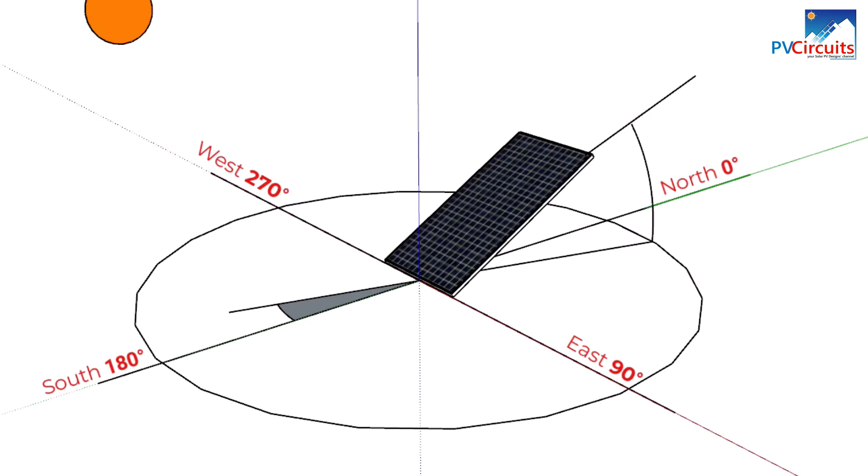Point number 2, the module's tilt angle to the horizontal is critical as to how much radiation will be directed normal to the panel. This is calculated from the latitude of the location where you are installing the system, or alternatively as dictated by the pitch of your roof. In this section, we are looking at how to set up the tilt angle and the azimuth angle. The tilt angle is based on this equation.

And if we look at this diagram, we can try to rotate the module to show both the tilt angle and the azimuth angle. So I start with the tilt angle, and if I use this protractor to demonstrate the tilt angle, it is that angle between the horizontal and the vertical tip of the module. As you can see there, that should give us the tilt angle.

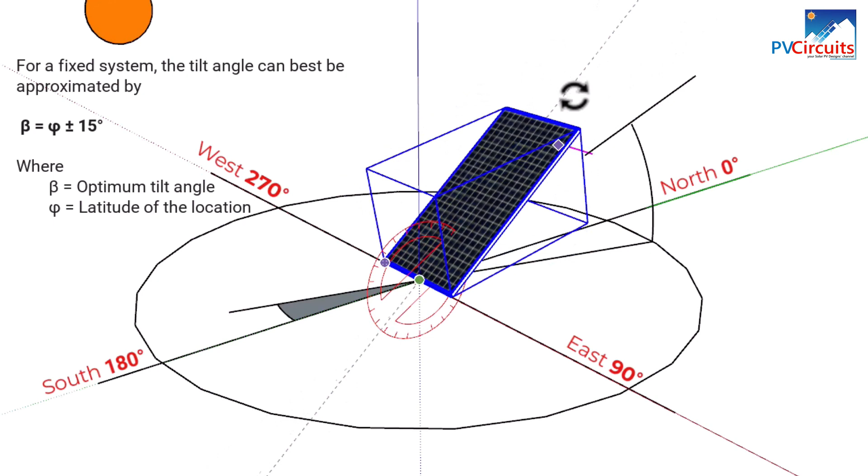And from the equation that we've just shown, you will be able to calculate based on your latitude where you are, and that will give you the tilt angle of the module. But this will be useful if you are doing a new module mounting. Otherwise, unless you put a mounting on the roof, the pitch of the roof will already fix the inclination of the module.

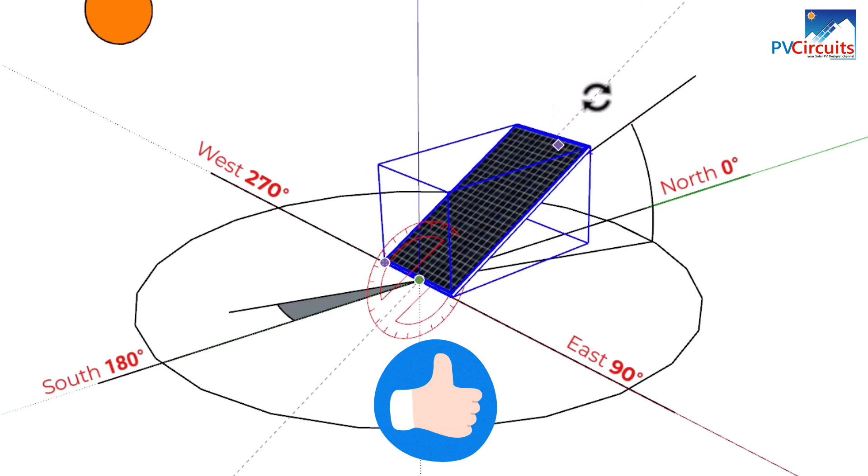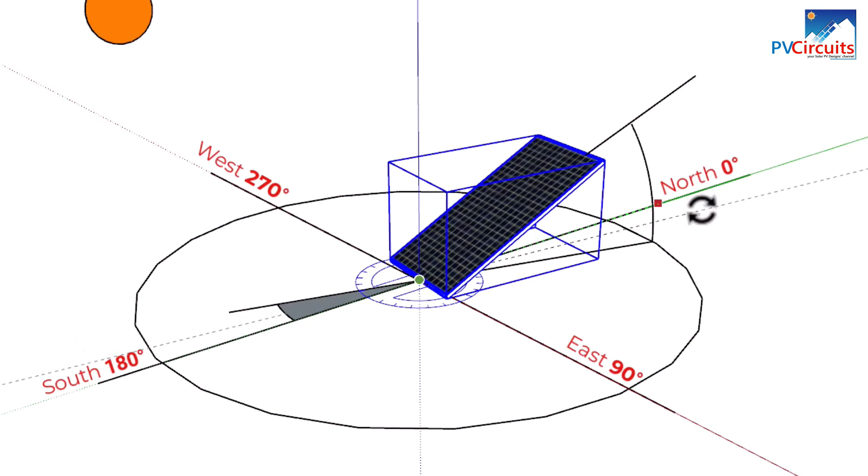If we look at the azimuth, it is the horizontal angle from the north, and it is measured based on your magnetic compass direction from the north. So that angle, the dotted line, giving us the clockwise movement from the north to south, is what you measure as your azimuth. And by using a magnetic compass or a mobile app, you can measure the azimuth.

So it is just that simple. It's not a complicated thing. So once you have the right tools, then you can determine the two angles that are required for setting your PV module for maximum solar irradiation collection. So we move back to the design.

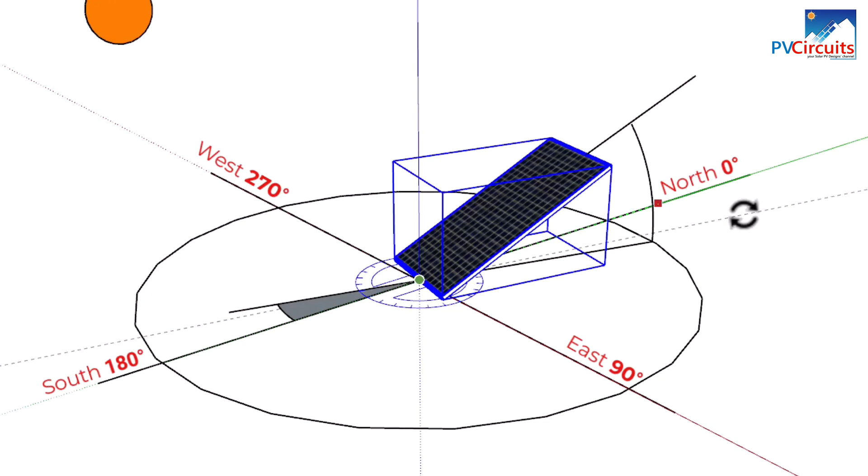The third point is the sun hours. The critical thing about the sun hours is the lowest irradiance that will be required to generate the needed output. During the year, it is required to know the month with the lowest sun hours, and this is what is used as the basis for the design.

For safety and security, it is required to observe personal safety during installation and security for the modules if the site is to be accessed by unauthorized persons. The other aspects that you need to observe during the site assessment include aesthetics, accessibility, roofing material strength, and the structure. This is for a roof PV system, because if you will be stepping on the roof, then you need to take caution so that the roof is preserved during the installation.

So there are 3 types of PV systems that are of interest to us. We start off with the off-grid system, and as the name suggests, this system is not connected to the grid. So we solely rely on the PV supply in order to charge our batteries. During the day, the battery is being charged. Then part of that power, if it is in excess, can go to serve the electrical components in the house.

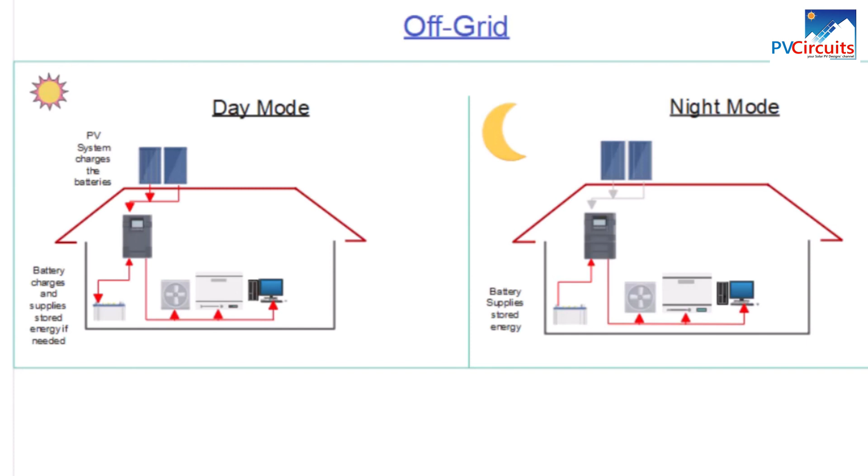At night, because there's no more charging of the batteries from the PV, the stored power goes to the inverter to generate AC for the household. So should it happen that the power is not enough, then we are likely to have a blackout. So that is one unique thing with the off-grid system.

Next, we look at the on-grid system, and in this system the supply is generated from two sides. One side is the PV system, which generates power to the inverter, then it serves the household components.

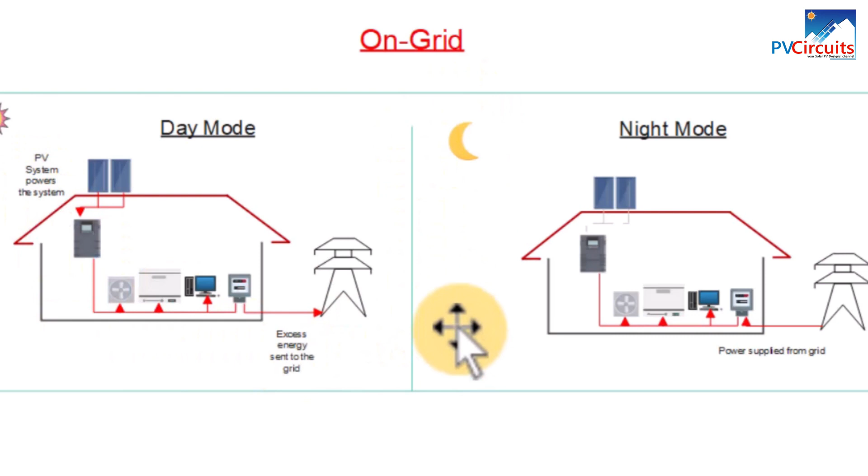Then if there is excess, it is passed on through the bidirectional meter to the grid. Otherwise, if there is no excess power, then there is likely power to come from the grid to supplement what the PV is producing. So at night, because there is no sun, the PVs are not generating power, so the only power should be from the grid.

In the hybrid system, we are having a combination of both the off-grid and on-grid modes. So in this particular system, what will happen during the day is that we will have it like the off-grid, where the PV will be charging the batteries and storing energy, and the excess energy will go to serve the electrical appliances in the household. Then the excess will pass through the utility meter and onto the grid. So that's during the day.

At night things change because there's no more charging with the PV panels. The only power now comes from the battery, and it serves the electrical appliances, and if there's a shortfall, the shortfall is met by the utility side or the utility supply.

In the off-grid mode, the utility is not connected, and during the day the PV panels charge a battery, and there is interaction both forward and backward, because if there is enough power, then the batteries are charged, and if there is a shortfall in what is demanded by the electrical appliances, then that power comes from the battery. If the power is not enough, the off-grid mode will lead to a blackout, because there will be no power from other sources since the grid is disconnected. So in this mode, as the name says, it is working just like the off-grid that we have seen earlier.

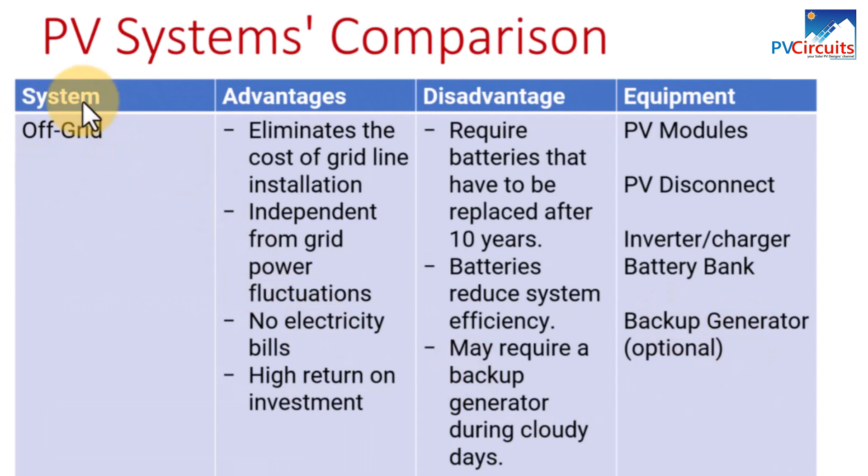Other points are that we need this equipment here. We need modules, disconnect switches, an inverter charger, a battery bank, and in some cases a backup generator. Of course, this may not be required, but at times the battery may go low and maybe the sun is not there to recharge. Then you may need something to supply power to the system, because we are off-grid and there's no line connected to our system.

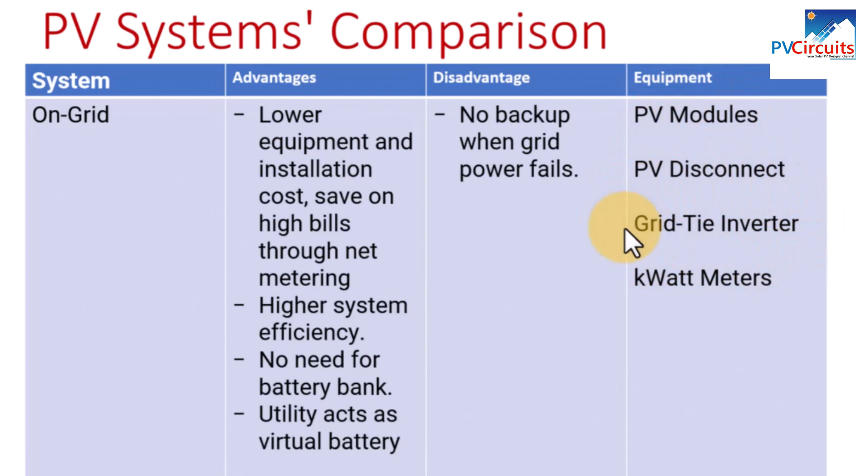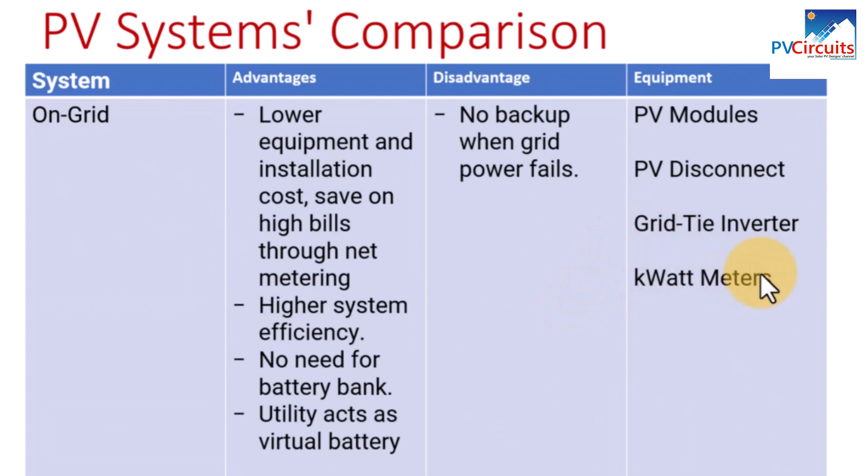The next system that we look at is the on-grid system, and we just look at the key points. There's no need for the battery bank, because the grid will act as a virtual battery, because you're just producing power and sending it to the grid. And some of the things that we need here are the grid tie inverter, and we will require the kilowatt meter that will monitor what you're producing, and also the grid company's meter which will monitor what they are feeding into our system.

The third system that we listed was the hybrid system. The hybrid system is a combination between on and off grid and has characteristics of both systems. The system can be set such that the PV power is exhausted before the grid is connected. That is a setting you put in the inverter, which will dictate when the power from the grid will enter into your house system. The battery provides a backup when the grid goes off and ensures an uninterrupted power supply. And as you have seen from this discussion, the hybrid system gives the best of both worlds of on and off grid systems. So this is the system that we are going to design for our home using the PVsyst software.

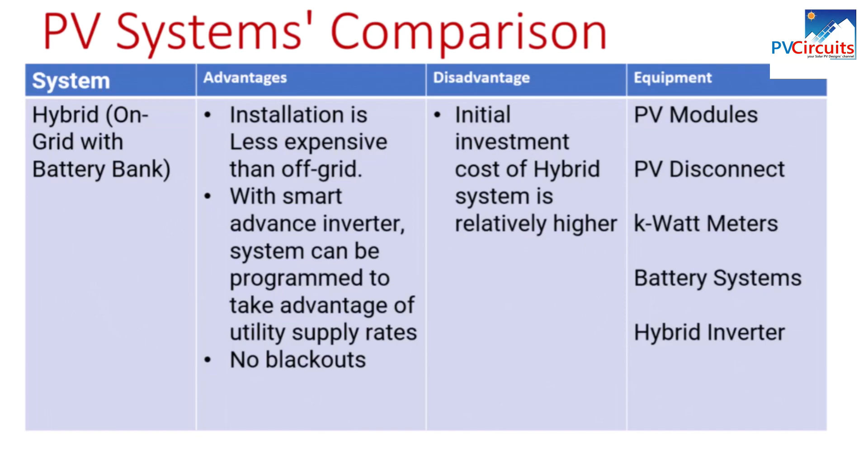However, the grid connected, when you add the loads to it, because it has the option for adding loads, then it becomes the hybrid system, which now has a component for supplying the excess power to the grid, but most of it is used in the house.

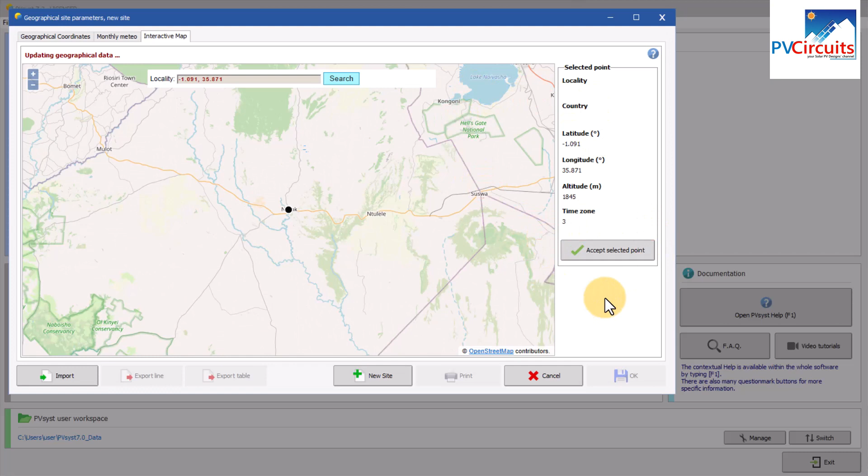Then I'll accept the selected point, then it wants me to put in a name. Let me just call it as the name of the town. Then I'll tell it to get the data, because we are looking for the data, so I'll tell it to get from the coordinates, and we click that.

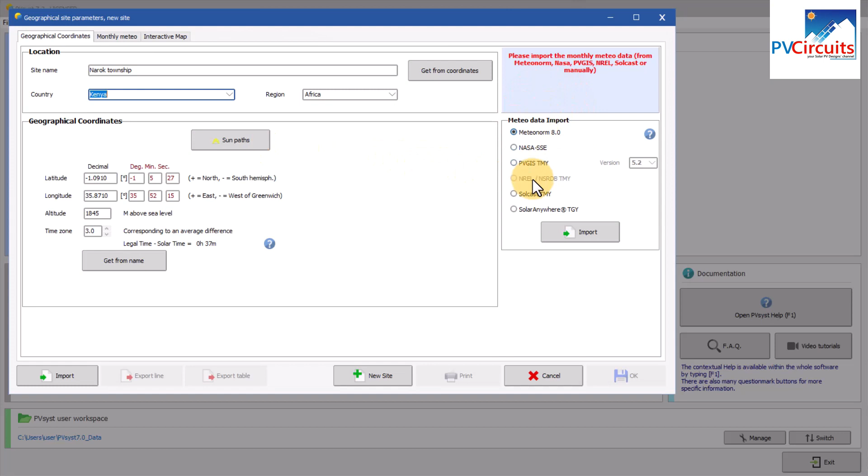So it needs me to define the country, so of course I'll select the country is Kenya. Then once I do that, this part opens up to allow us to import the monthly meteo data, and we are getting it from Meteonorm. So I'll click import. So having good connection is very important. So you can see it has brought for me this data for the site.

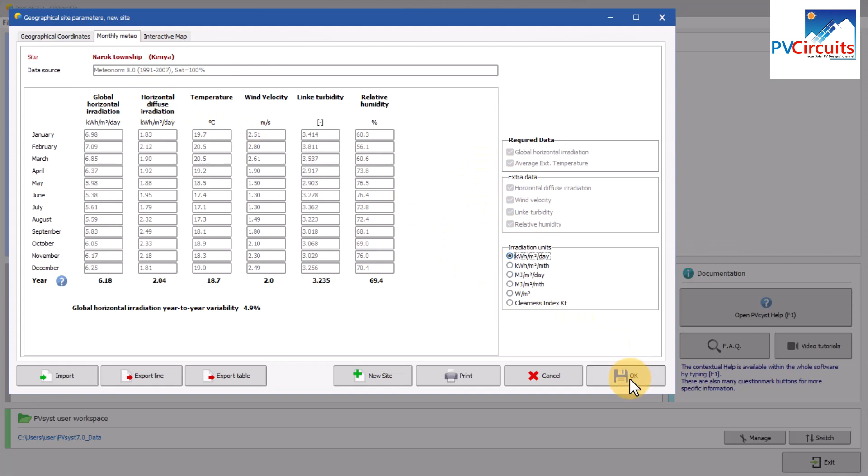This is a global horizontal irradiation, which we need, which will tell us the sun hours. So instead of this highlighted one, I'll pick on this one for the day, not for the month. Then with that, I'll accept this data, click OK. Then I'll save it. The dialog here is the geographical site file Narok Township is now saved in the database. I'll say OK.

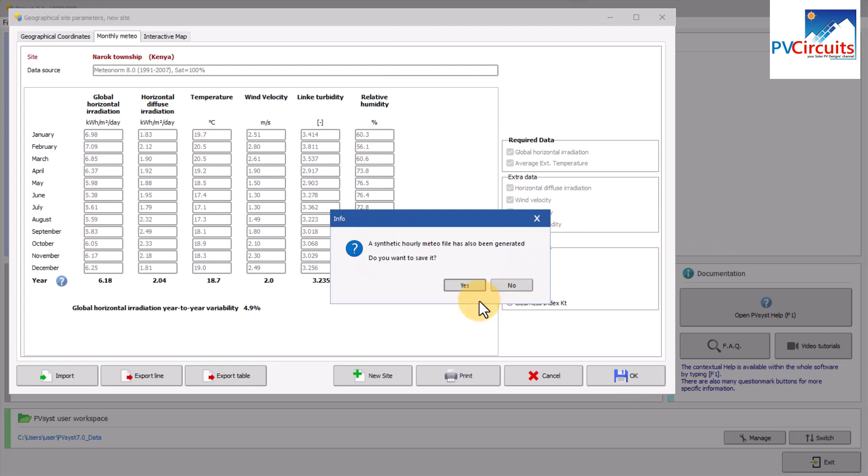Then accept this one. So this is saved. Then the data is now into the system. So from here, it wants us to, selected Narok file, please save project. So I'll save the project. So once it has saved, it opens up this page, which is where the main design is going to take place based on the following tabs going around. And then eventually it will open the simulation part.

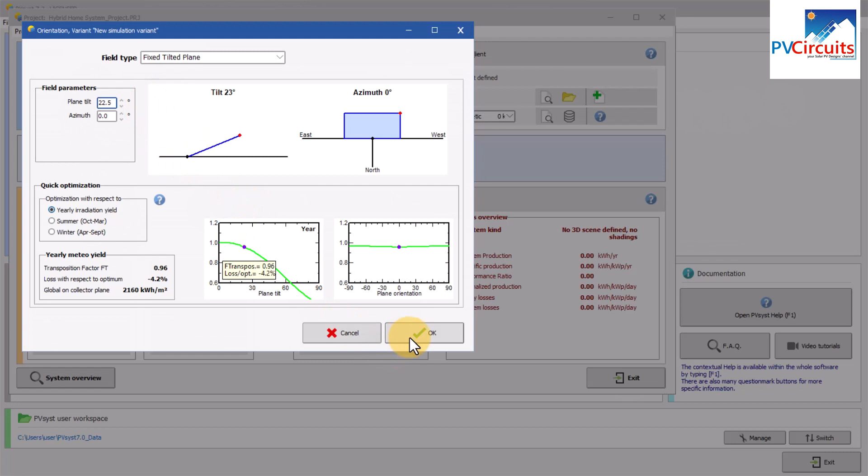So the first thing to do is to do the orientation. And here we supply the details of our roof, because this is going to be on the roof, and our pitch is 22.5. The azimuth is 0 because we are in the south, so I'll accept that. So you can see the orientation has turned green. Then I go to the system.

And the system here, we need to supply the planned power. Then we'll select the modules, then we select the inverter, then the other information it will process. So let's start by giving our planned power. So I'm going to put about 1.8 kilowatt. Then we need the PV modules to supply that power. So I'll select, okay, it has selected Jinkosolar, so I'll go by that Jinkosolar. There are others though in the list. As you can see, there's quite a number in the list.

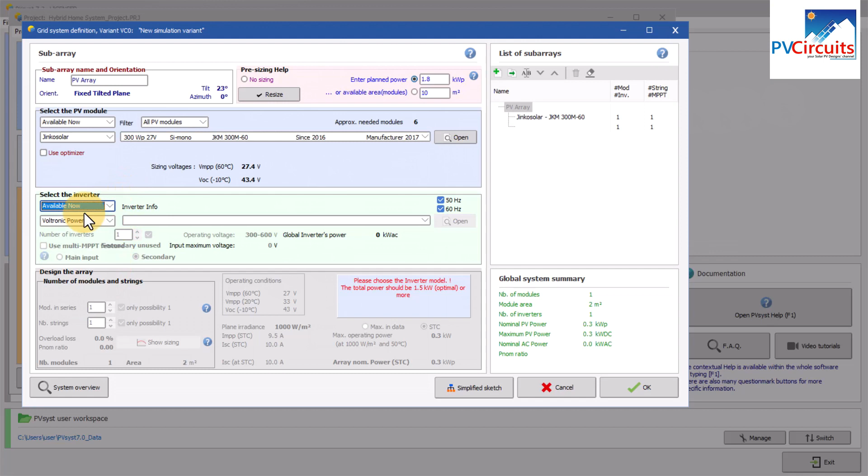Then we select the Jinko that we're looking for. Now to get 1.8, I'll go for a Jinko of 300 watts. So 300 watts is here. Then I think that is okay. So it is seen that we are going to use 6 modules to get, of course, 1.8 kilowatt. Then we give it the inverter now. So here we look for the inverter, and the one I want to use is, yeah, this one, Voltronic Power. That is a company name.

Yes, and this inverter was not in the database. I've just put it. So if you don't find the inverter you're looking for, because this is where the main design is, by just selecting any inverter, you will not know the characteristic of that inverter. You need to have its data sheet so that you can be sure that the inverter you are looking for is the right one that you're putting for the design. Because the inverter that we are using now, this Voltronic Power, and with that model there, InfiniSolar.

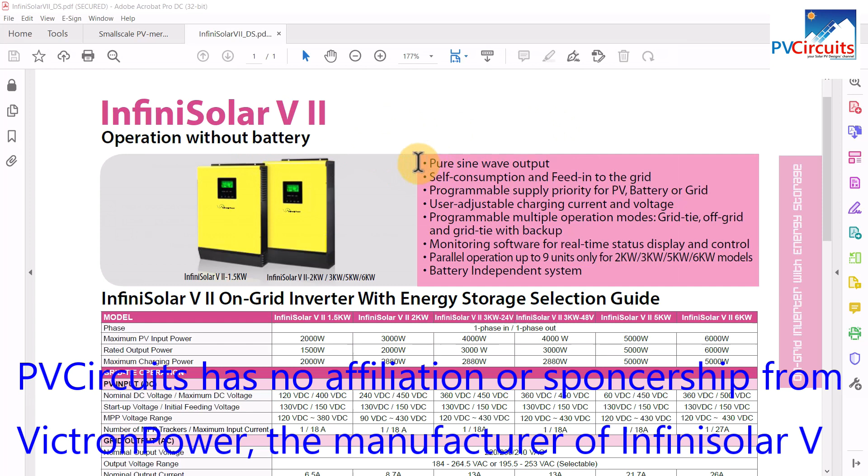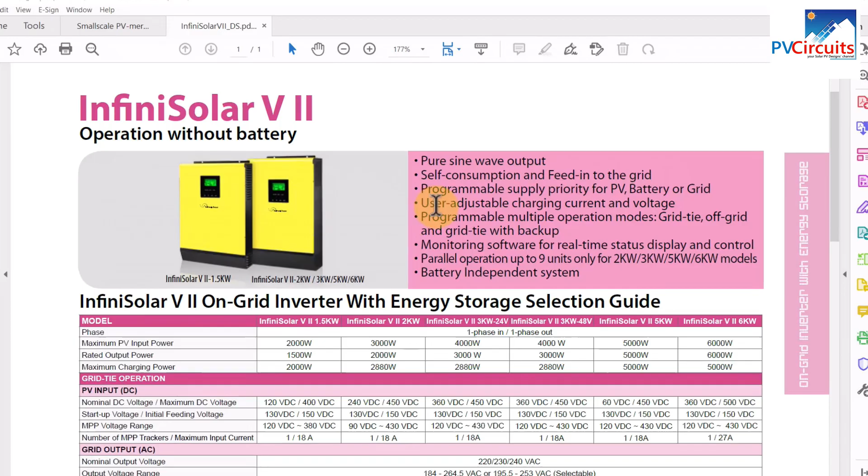Now this inverter, if we look at the data sheet of the inverter, you will see that this is a grid tie inverter, but with very specific functions. So there is this part of self-consumption and feeding into the grid. This part is very important, and also there is the part of the charging of the battery, so that you're using the power for self-consumption, but also the excess is fed into the grid. This is a unique part of this inverter.

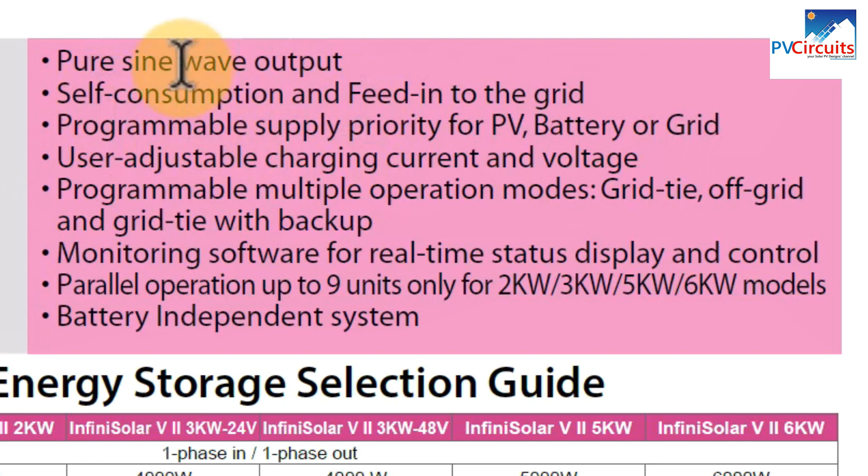You can of course use other inverters and combine it with a charger controller, so that you have now 2 electronic devices there, the controller and the inverter, to give you this functionality that is on this single inverter. So that is why I've selected this inverter, to be able to take us through this design.

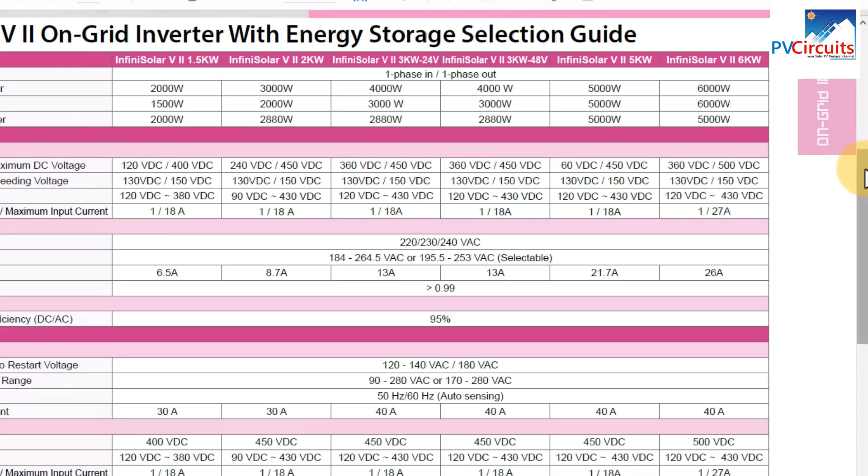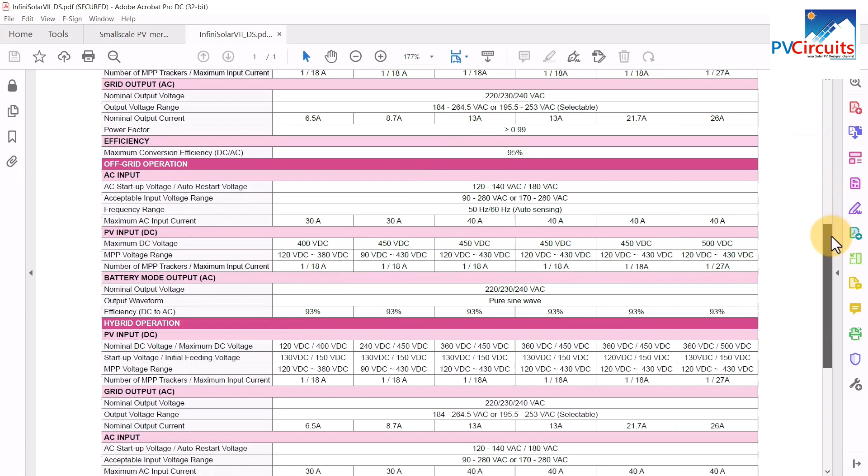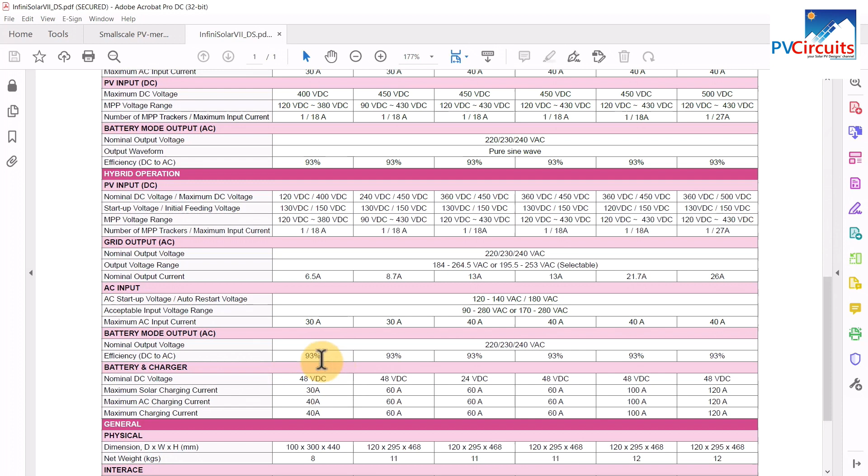Also, some of the notable features of this inverter, if we just scroll down on the datasheet, we see the voltage nominal and the maximum it can take per string. Then what we'll use immediately is the battery charger, and that it is a 48 VDC. So we shall see this when we are selecting the battery for the storage. So we go back to PVsyst and continue with the design.

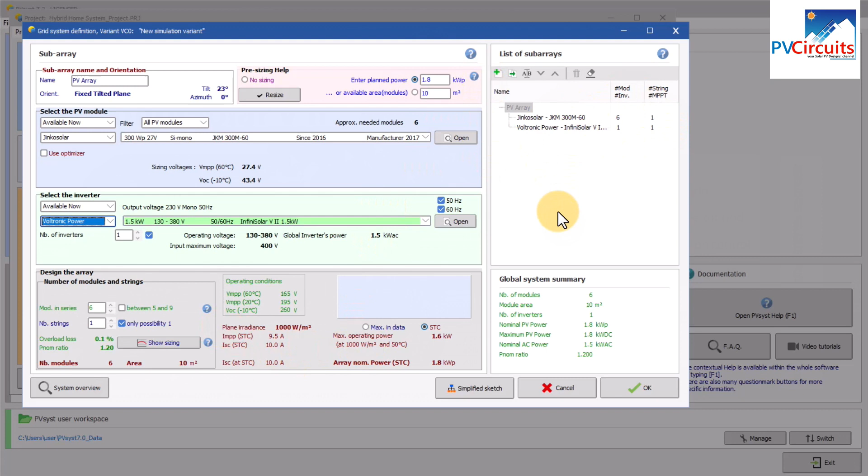So if we look here, we see that it is saying that it will have 5 modules in series, although we have 6. For us to be able to have this power, I think I'll push it up and slightly overpower the system, so that still there's no error here. So we continue with 6 modules in series and 1 string. On this side I think everything is okay, so let's proceed. Then the system is set. We are still not going to run the simulation because we still have all this to do.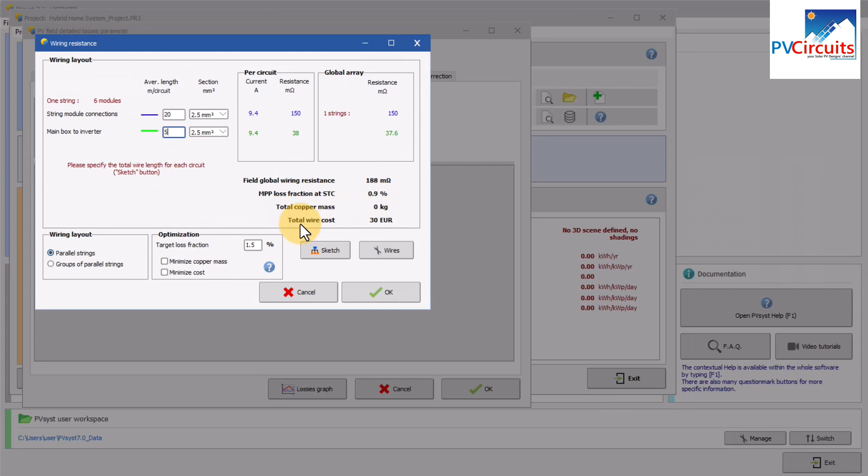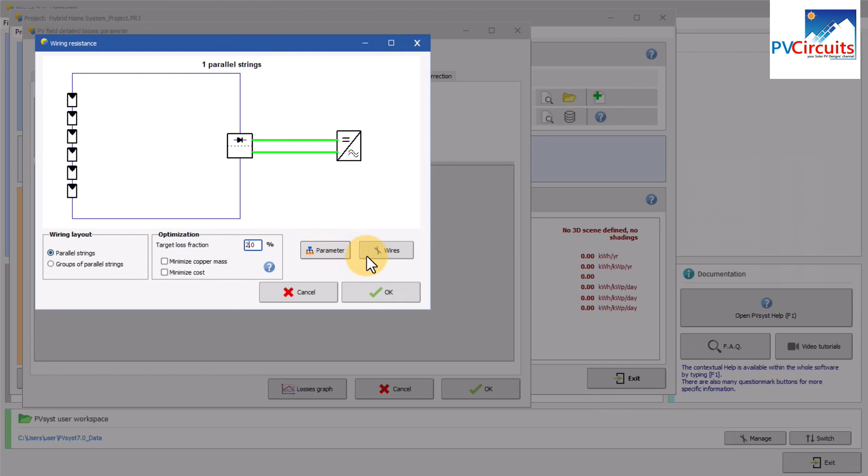And there it is. So looking at this, global array resistance is 150 milliohms. Then we can see the losses here at about 0.9%. So let us look at the sketch. That is a sketch, and this is what we are looking at. Let's go to the target loss fraction. Most of the time I'll put here 2%. Then we look at the wires, and the wires I think were done in a design earlier, and this is just estimation of the wire prices. So this is just okay. I move on to the next stage.

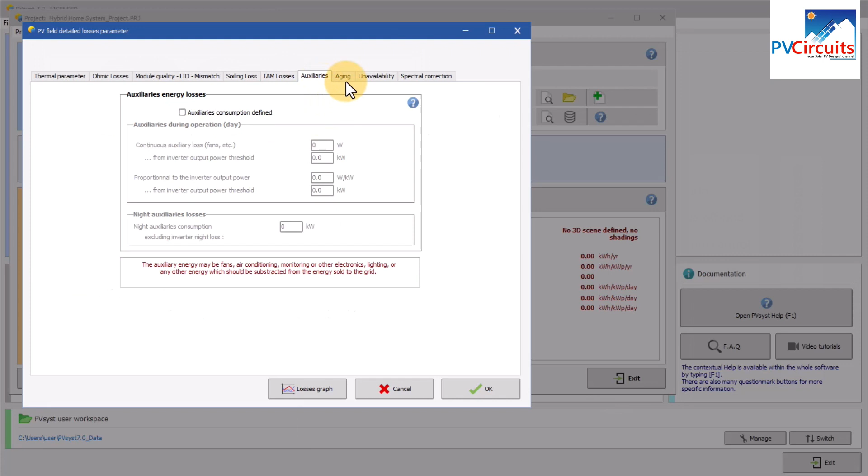Ohmic losses, module quality, I'll not touch that. Soiling loss, maybe I need to put something here because after all these things will be dirty and so on, so I'll take on the default value they have. Then other losses, I'll leave them as they are. So I think we are done with that section. I'll say okay.

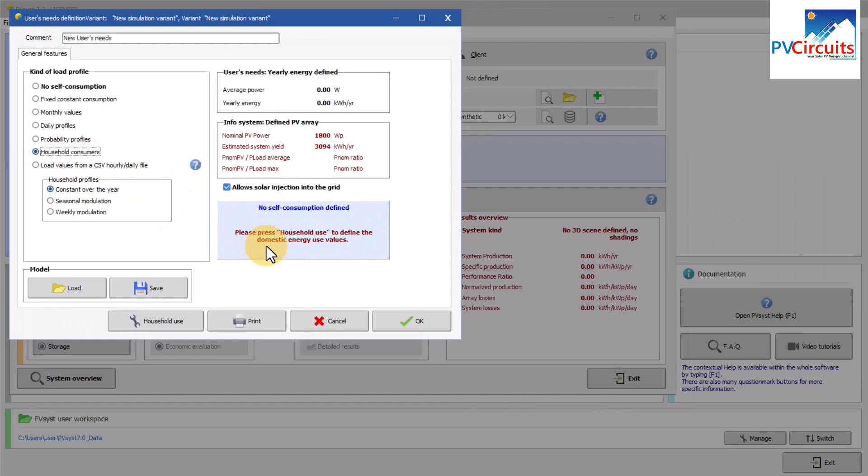Self-consumption. Now as you've seen, the inverter is feeding to the grid, but it has the part for self-consumption. Self-consumption means that the power it is producing will first of all be used in the household before it's taken to the grid. So I'll click on this one, and we need to define the usage of the items in the house that are going to use power. So I'll click on household consumers. Those are the items in the house, and when you click that, this screen comes here. Always look at this blue screen here to tell you error messages or what you need to do.

So here it is telling us we have not defined, so please press household use, which is this one here, and when I click on that, it opens up this table where I am supposed to fill the items or the electrical loads in the house. So if I start with this one, these are lamps, so I'll put about 5 lamps. These are lamps in the house, and when I click on that, it opens up. So the power that each lamp uses is 10 watts.

Then I have one TV using about 150 watts. That is TV, 150 watts. Then another item is the laptop, one laptop, and then I give it 120 watts. I come to the fridge, one fridge, and maybe give it 2.5 kilowatt hour per day. I don't have a dishwasher.

So other thing, I can put in 4 security lamps, using about 10 watts each, as in the first case. Then other uses, miscellaneous electrical items in the house using power, so I'll give them about 100 watts. So if you have other things, you can group them or combine them if the space is not enough.

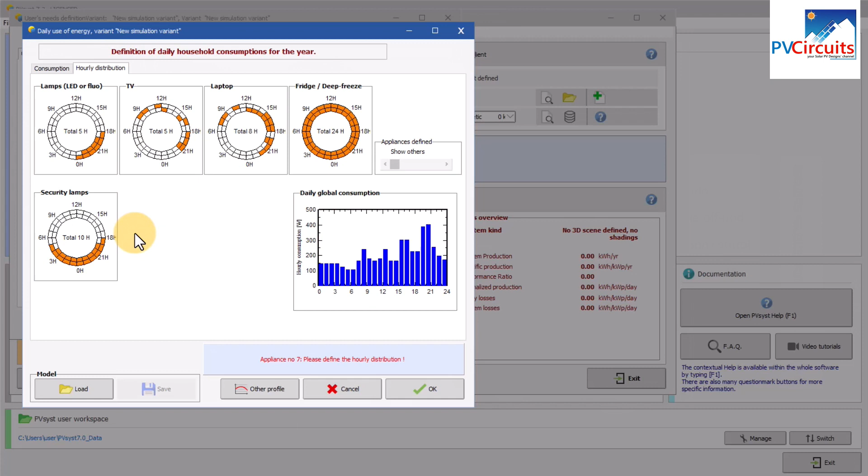Then we move on to the security lamps, and these will be on till close to the wee hours of the morning. So we continue like that up to maybe 5:30 there. Now if you don't see something, you move this thing here so as to show you all the items that you have. So you can see the other uses was hidden somewhere. So now it has come out, so I'll fill it.

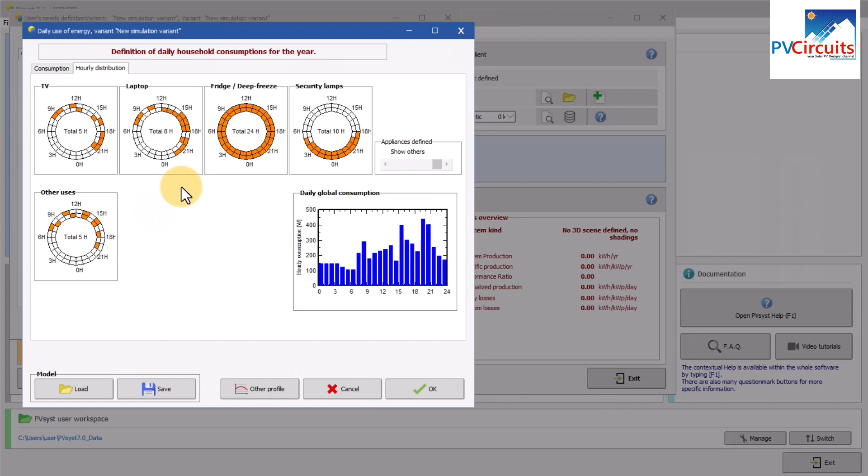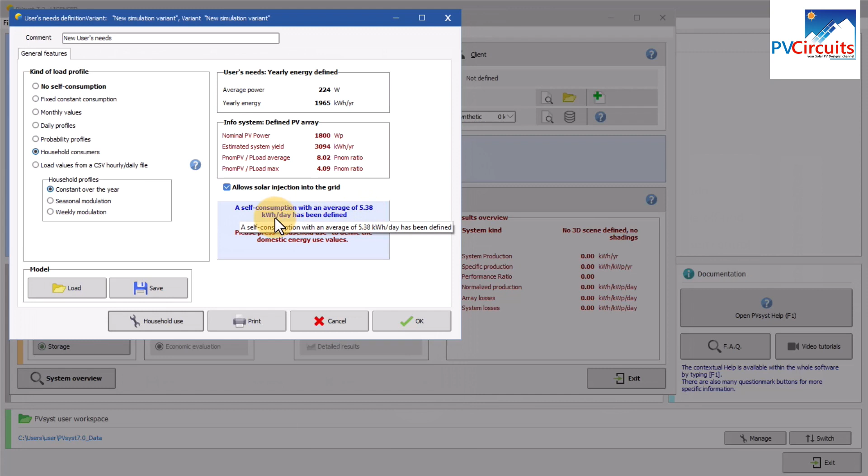So other uses also for 5 hours, and these are small items using electricity in the house, charging phone, maybe the blender, and so on. Right, so that one is done. So I think all of them are done. If you want to be sure, go back to the consumption and you can now see everything is okay. So we are done with the consumption. I'll tick OK. The message here is a self-consumption with an average of 5.38 kilowatt hour per day has been defined. So this is okay.

So you can see the self-consumption is now highlighted. So there's an issue of the storage, so let's go to the storage: please choose a storage strategy. So what do we want to do? We want storage for self-consumption, and when you do that, it opens up the battery for you to select. The consumption is what we have already told it. You can see that it has already picked it. If I click on it, it will show us what I've done before. Yeah, we were here before, so let me just cancel that.

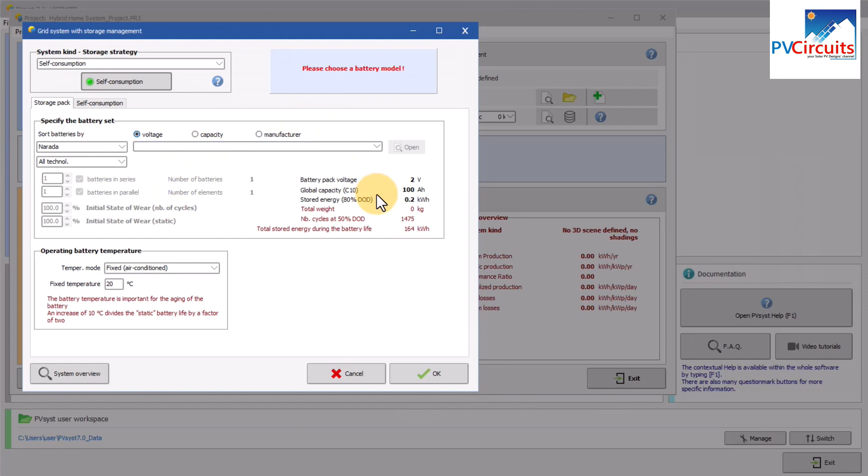Then here we are supposed to select the battery. So before I can select the battery, we need to know the system ampere hours so that we can decide how many batteries we are going to use. And for that, I'll step out here so that we can look at a presentation of how to determine the system battery. So in order to calculate our battery requirements, we are going to use this equation here, and it states that the system ampere hours is given by the daily consumption times the days of autonomy, meaning the days you'd want.

If the system is down, then you still have power from a battery, then divided by the system voltage times the depth of discharge times the inverter efficiency times the battery derating. So that gives us the battery size of the system.

Now if we look at what we have already calculated, we already have the daily consumption as 5380 watt hours per day. Then the inverter system voltage is 48 volts VDC. Then the days of autonomy, we want that we can be 1 day, full day without power. If I wanted maybe 2 days, that will increase the cost of the batteries. And the depth of discharge is how much do you want the batteries to be drained before recharging takes on. So we want it at 50%.

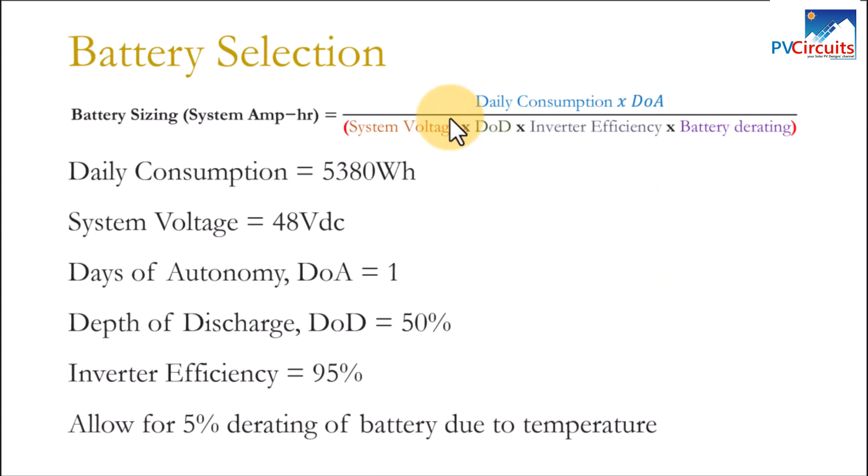Then we have the inverter efficiency. Then because of temperature affecting the battery cells, we have to adjust that, and we derate the batteries by 5%, meaning that they're operating at 95% efficiency. So that is the equation. When you put in the figures, we get the system ampere hours as 248.4, and that approximates to about 300 ampere hours. So the batteries that can work with this system are 12 volt at 150 ampere hours.

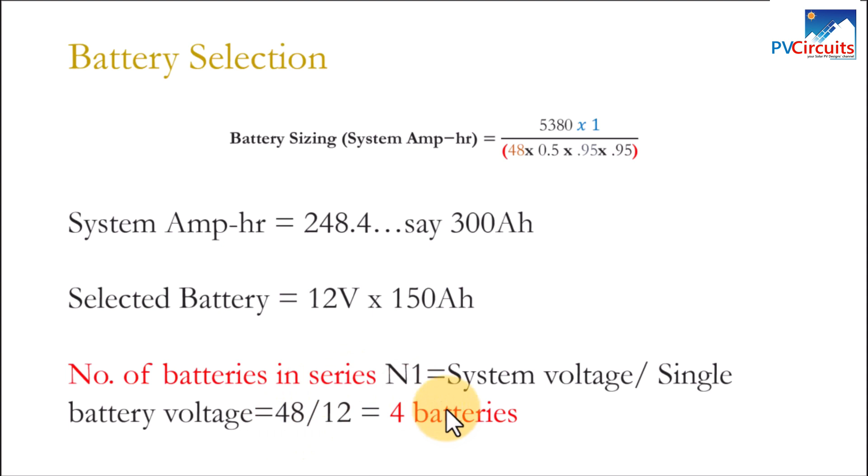So to know the number of batteries in series, we take the system voltage divided by our battery size here, and that gives us 4 batteries in series to get 48 volts. Then we look at the number of batteries in parallel, or the strings. This is given by the system ampere hours, which we have calculated at 300, divided by the ampere hours of the battery. So we have 2 strings, meaning that we have 4 batteries in series times 2 strings. So there we are, we have finished that calculation.

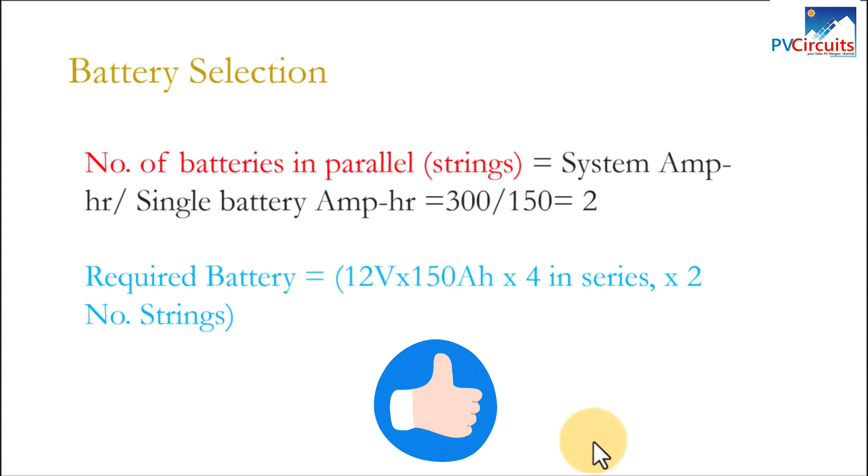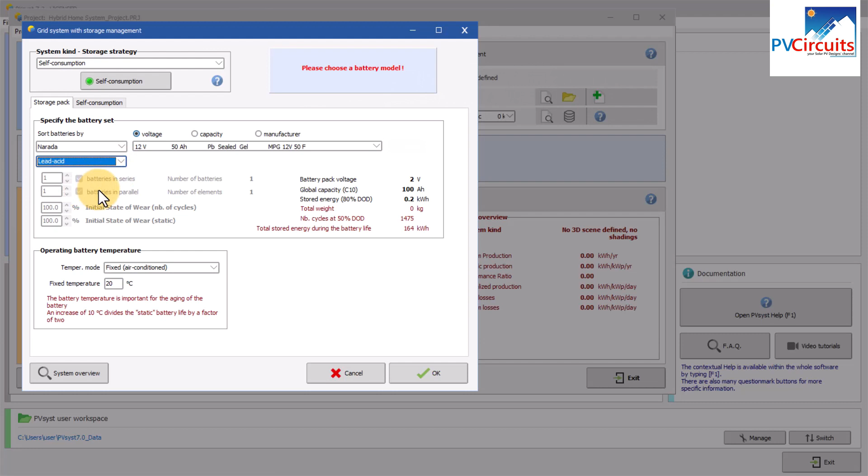We go back to PVSyst to continue with our design. So we have gone through that battery selection presentation. Now let us put that information here in PVSyst. If we open here, this gives you the names of companies that are making batteries. And there's a technology, so I'll choose lead acid. Then from this company they have a list of batteries one can select from. The battery that we've selected is a 12 volt 150 ampere hours, and it is this one here.

Then we have seen that we need 4 batteries in series so that we get 48 volts. So I'll put that one. So 48 volts. And then we need 2 in parallel, which gives us 300 ampere hours. So our setting here is done with those configurations. And what you need to know also is, if you look down here, the system charging time during full sun condition is 6.4 hours. The discharge under average load is 51.4 hours, which is slightly over 2 days. So we are okay. I'll accept this configuration.

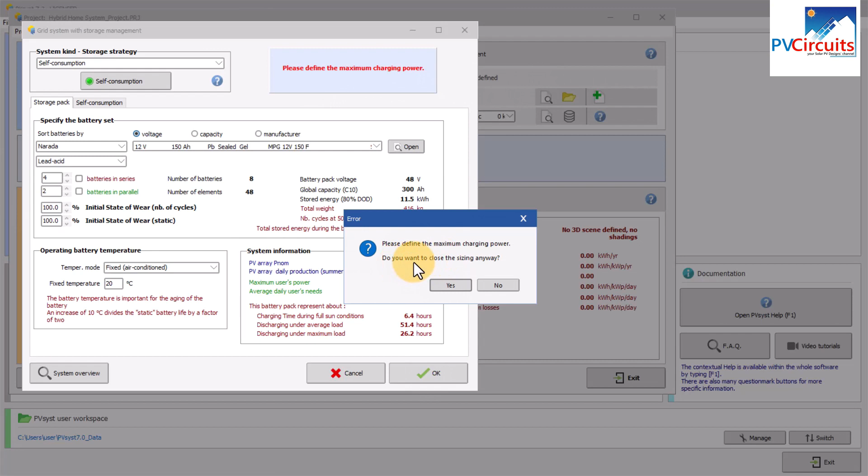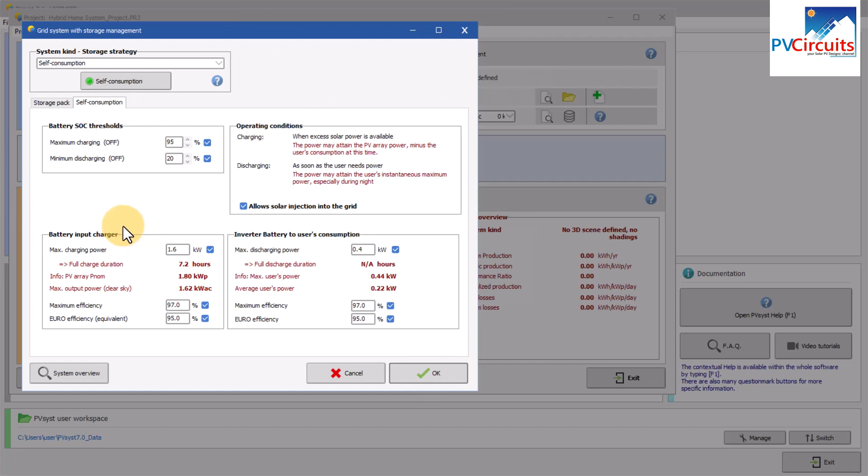Then please define maximum charging power. So let's define the charging time. If we come here, the maximum charging power is about 1.6. That is what it was asking. So I think I'll just leave it like that, so that it uses power to charge and then store it in the battery. Alright, so I'll just click OK. Then it is ready for simulation.

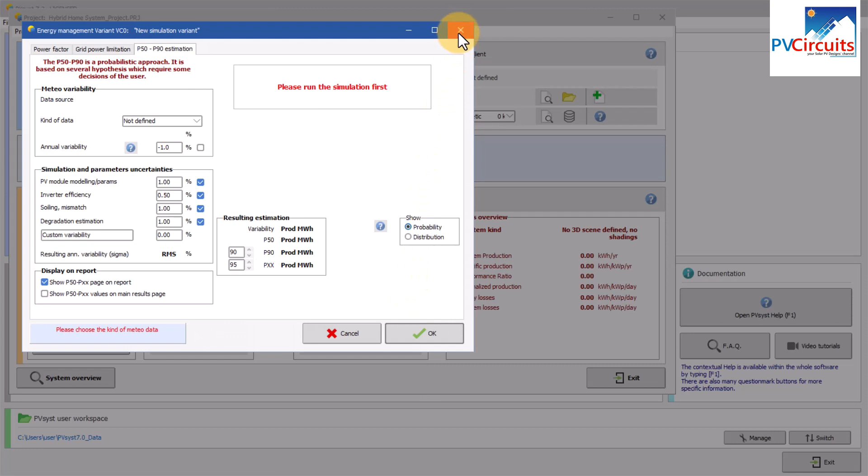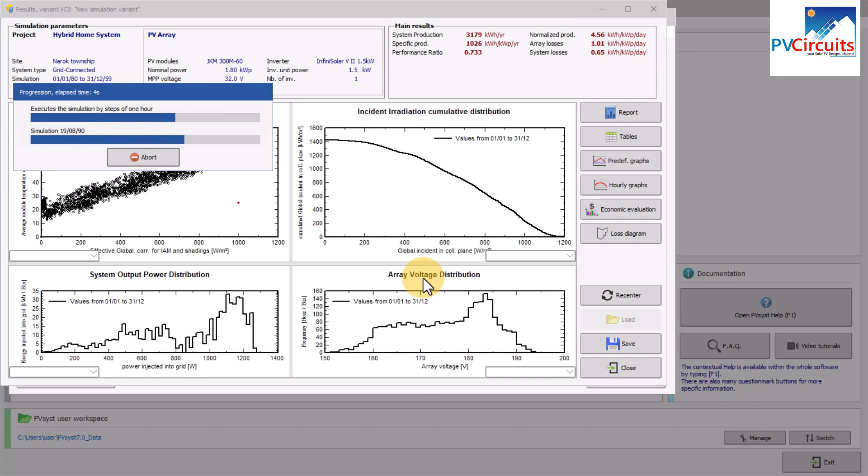Now see that all these have been turned on. I will not do the horizon and also maybe near shading. Let's click energy management and see what is there. And this is power limitation. I will not go into that. Then also please run the simulation first, so I'll do this one afterwards. Maybe it will give us the information then. At this point I'm ready to run the simulation. So I'll click on run. Then it will go through processing different information to give us the results.

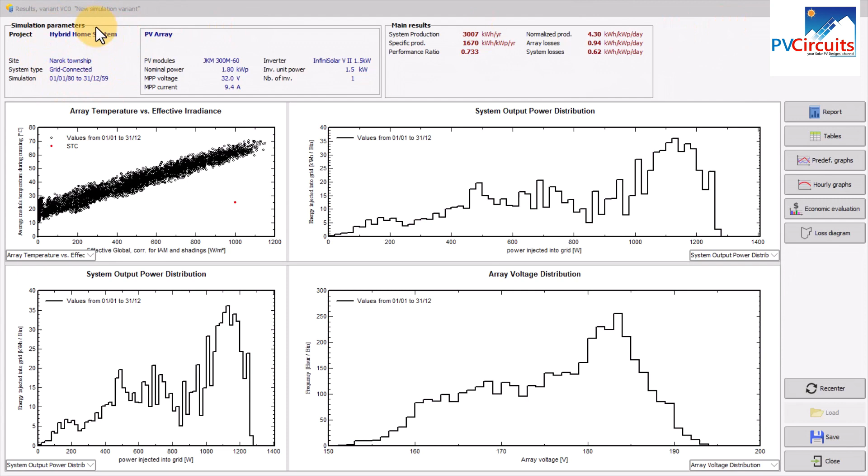So these are the results. Various tables are under here, a lot of information. You can choose the table or the graph that you want to show. Several graphs are there, but of importance is also this top part here. This is about our project. This is the information on the modules and the inverter. Then this is about the system production per year, and this is actually the main results. The report actually is incomplete before doing the economic analysis. So I'll click on the economic analysis.

And we need to work out the figures so that we have sort of like a bill of quantities that can be used to analyze the profitability of this system. So I'll start from here. We have 6 PV modules, and I'll put this per piece. Let me change this to dollars, it's easy to work with. So I'll give these ones $100 each.

Then module support, these will be fixed on the roof, so maybe I'll spend about $40. Then we come to the inverter. This inverter, I'll give it about $400. Of course it could be cheaper than that, but by the time it arrives where I am, it could be that amount. Then the batteries, there are 8, each of them I'll give also $100. For the fasteners, I'll just give one lump sum of $30. The wiring also one lump sum, maybe $40.

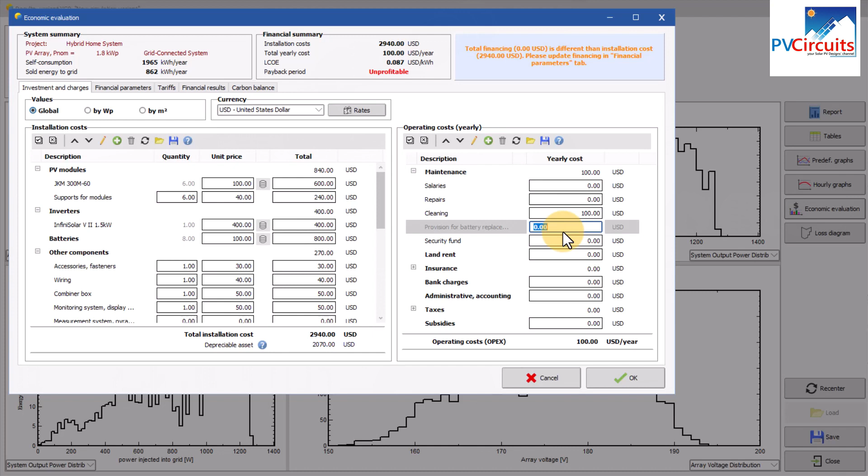I'll not be paying any salaries, maybe cleaning of this thing, say $100 in a year. Then there is the provision for the battery, because after 10 years we need to replace the batteries. We'll need 8 batteries, so maybe $80 or $90 per year, so that by the 10th year we have about 900. The others, I'm not paying rent, I'm not paying insurance for this thing, although it is good to have insurance money.

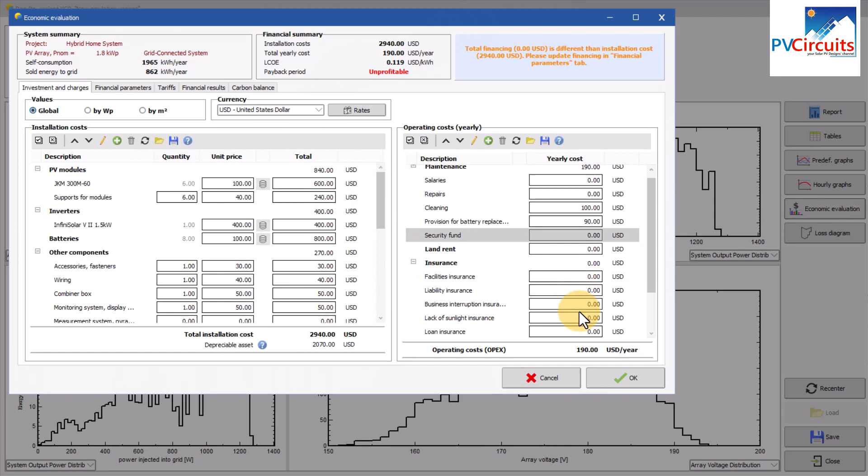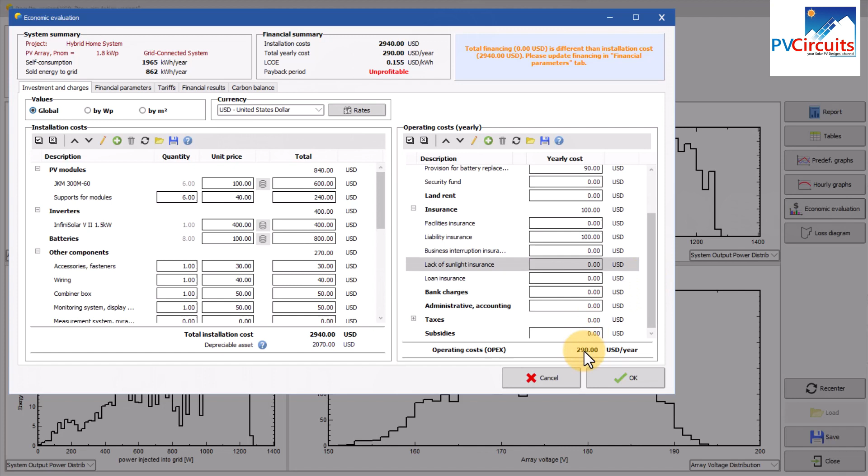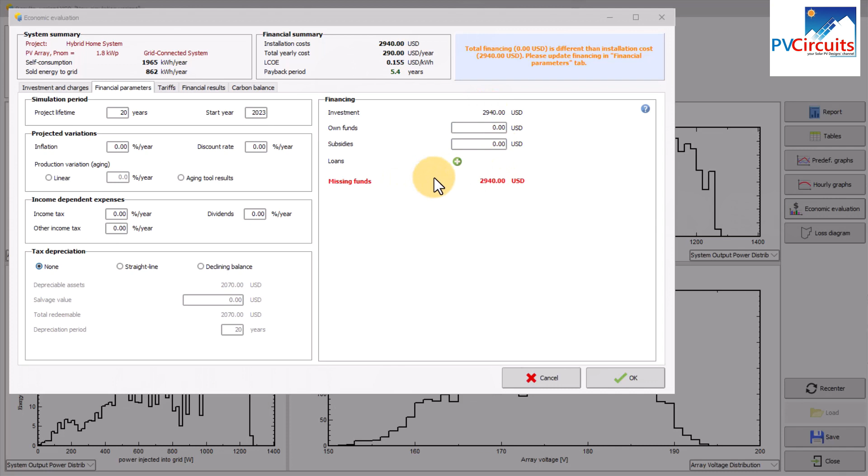Okay, I could add in insurance. Let me say liability insurance, maybe just add $100. And the rest I'll leave like that. So the maintenance side is 290. The equipment side is 2940. So once you finish with this page, you go to this tab here. When you come to this page, you will see the following information. I'll be using my own funds to do this project, so I'll put in 2940. Then that one now is covered.

Then when we look at the tariffs, maybe this one is very high. If I put 0 here, you will see what it says about the system. So depending on your setting, you can put in the values as per your region, and maybe I'll put in $0.3 per kilowatt. Then because we are not being paid this money, the power that we produce passes through the bidirectional meter supplied by the utility company.

So when we supply power into the grid, the meter works counterclockwise, and when the utility power gets into the system, it works clockwise. In other words, it works in the reverse direction when we feed power to the grid, and in the forward direction when we draw power from the grid.

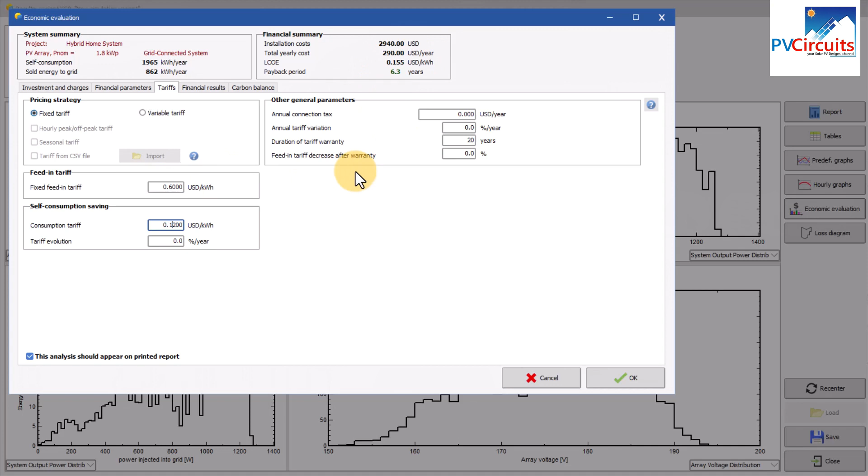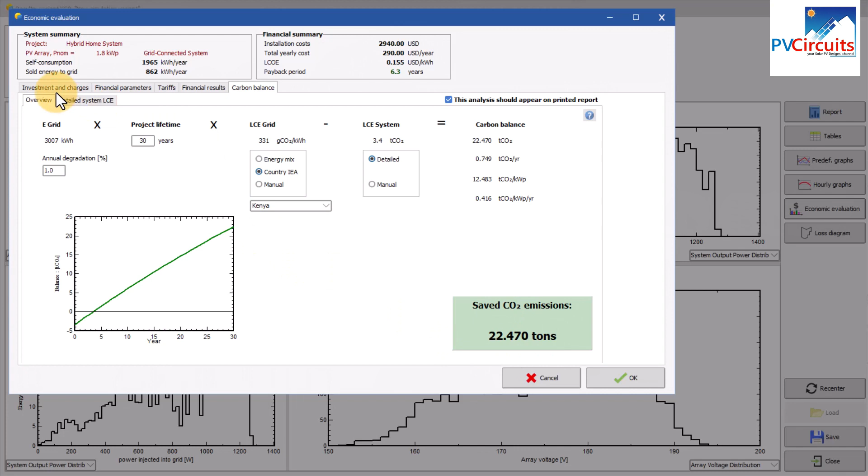So the payback period for this project is looking like 14.4 years, which is a very long time, but it is because of the feed-in tariff here. If I increase this one to 60 US cents, for example, you see that it reduces to 6.3. So that is a financial analysis. If you look here, this is the tons of carbon emission that we will have saved by doing this project. I think basically that is part of the economic analysis. So I'll say OK.

Then the next thing is to look at how the report looks. So if I click again to generate the report, it should now have the economic analysis included.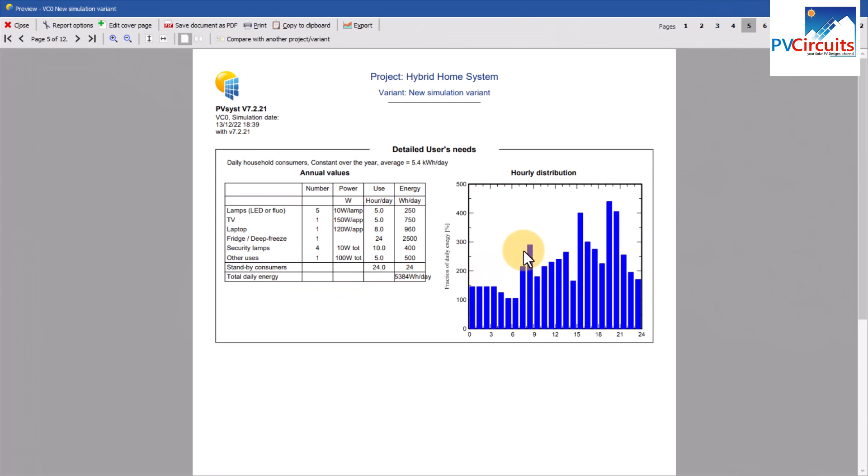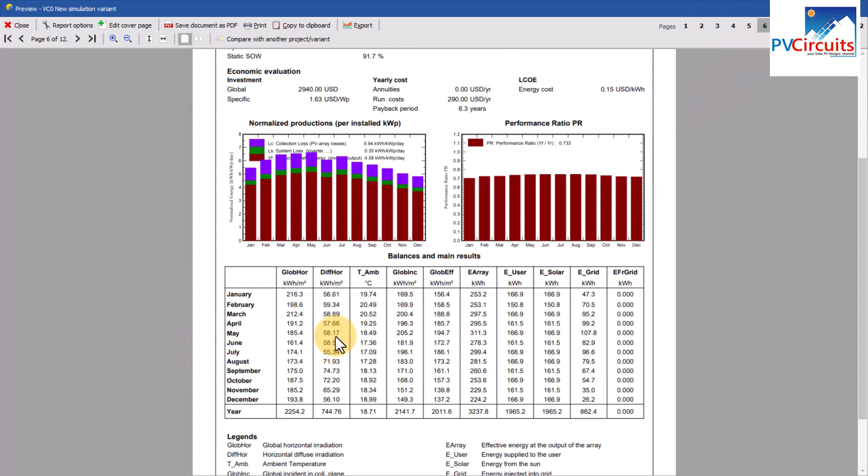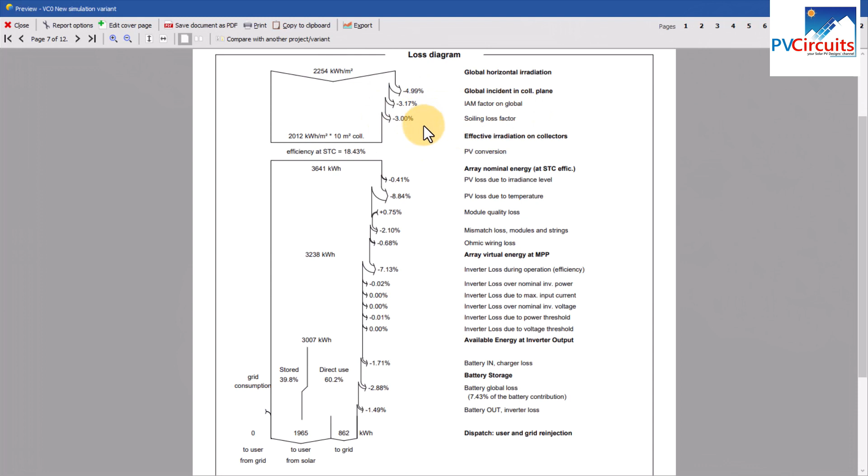So we proceed. Now this is a system loss, how the energy is lost as it comes in. This is what arrives on the panel, and then this one gets off. You can see the soiling loss that we put in there, and eventually at the bottom we are using 1965 kilowatt hours of the produced energy, and 862 is sent to the grid.

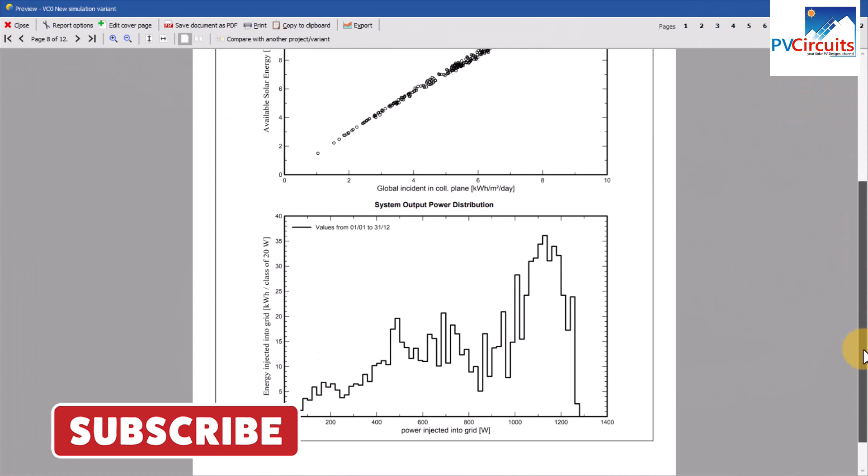What else? Those are graphs, more graphs, and this is like our bill of quantities or bill of materials, and you can see this is our total, 2940, and of course these ones affect the profitability of the system. So depending on your costing, if some of these costs are adjusted, then the break-even point of the project comes much earlier than the 6.3 years that we have seen.

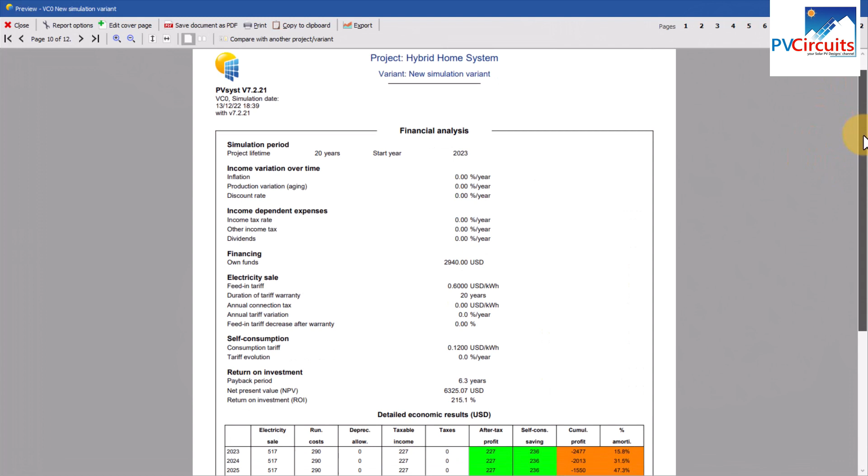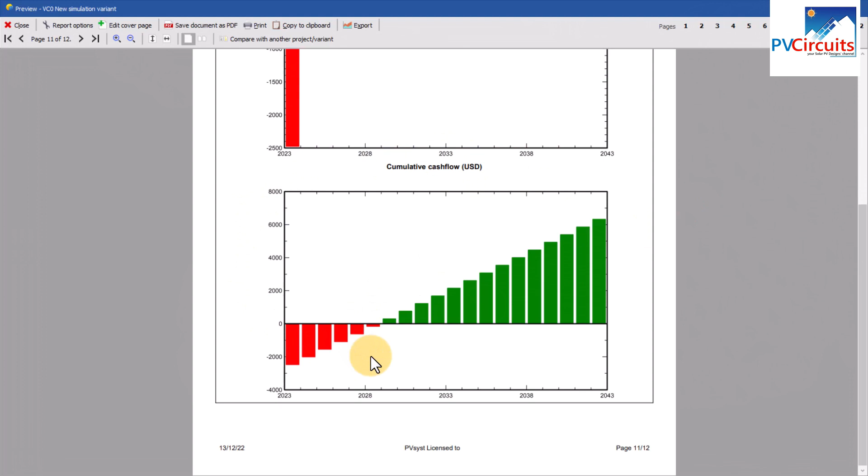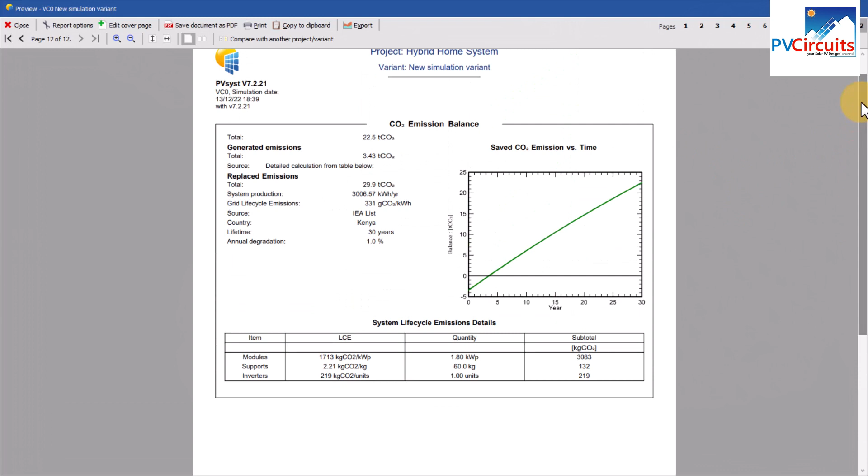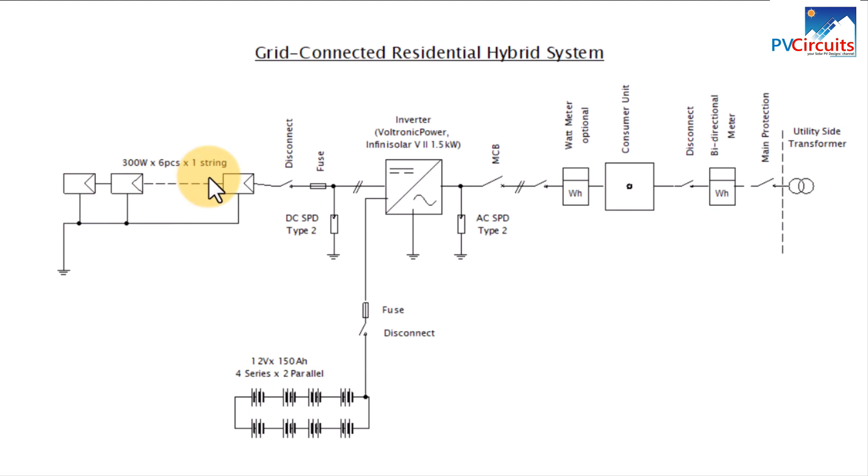So this is a one-line diagram of our installation, and I'll move from left to right, looking at the various system components that we have in the design. So we start with the solar panels, and there are 6 pieces of 300 watts each, all connected in one string in series. Then we have a disconnect switch and a fuse, either fuse or MCB can do. The line is 2 cables, that is a sign there.

Then we have our inverter, the Infinisolar V II at 1.5 kilowatt, and as we saw in the data sheet of this inverter, it is an on-grid inverter with energy storage functionality, meaning that rather than send the power to the grid entirely, it will first of all store that power, because our produced power is cheaper than the power from the grid.

So it will produce that power and we store it in the battery, and the batteries are 12 volts 150 Ah, 4 connected in series, and the series are in parallel together. So once the inverter has supplied us with the power and charged the batteries, then the excess power can be sent to the grid, meaning that its function is to help us save on the expensive grid power.

So we have the inverter, then we have on each side a surge protection device, and this is the DC side and this is the AC side. Then we have an MCB just to control or protect our system here, and a disconnect switch, so if we don't want to send the power to the grid, then we can put off that switch. Then we have this optional watt meter to monitor what we are producing and sending across. You can either have it or leave it out in your design or installation.